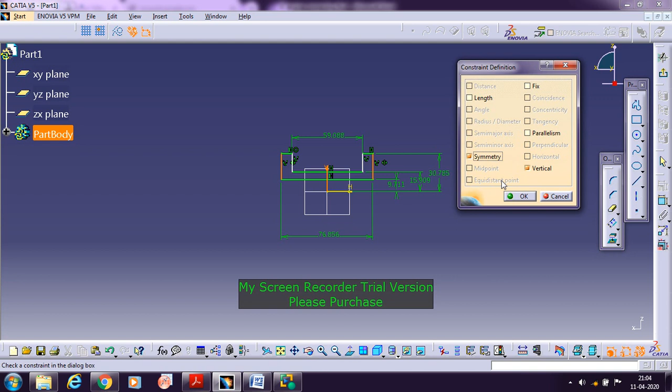Similarly, for these two lines, you need to press and hold the control button, click on the first line, click on the second line, and finally select the reference axis with respect to which you want to make it symmetric. Select the three lines, go with the constraint dialog box, symmetry, and click OK. Now you can change the dimensions.

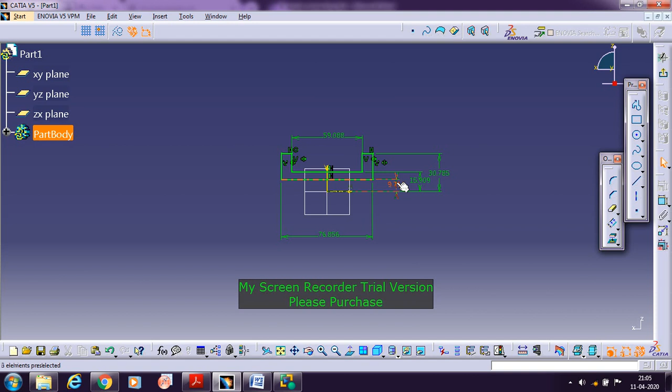To start with, if I take this minimum one, the minimum dimension is 41, but in my case when I take it, it will be more than this. So I'll come from the bigger dimension, or I can fix these two dimensions here. It will be easy. So this inner one is 33 mm, and the outer one is 39 mm.

Then, coming to the bigger dimension, I'll come from the bigger dimension here. The first one is 56 diameter. When I take the radius, it will be 28 mm. So the radius will be 28. And the second one, after 56, 48 is the next bigger dimension. When I take the radius, it will become 24.

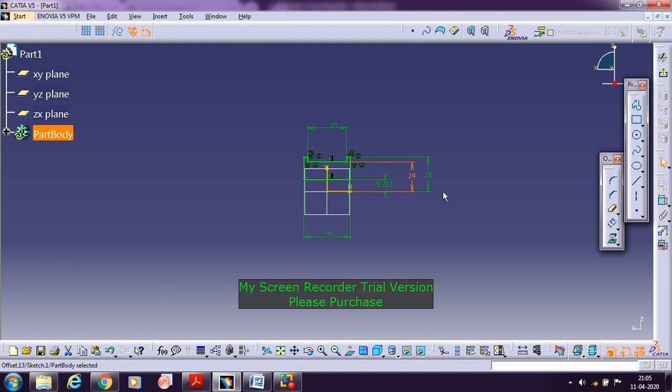And the last one is 41 mm diameter. When I take the radius, 20.5 is the radius. In this way I'll be getting the dimensions. Then it is showing the green color, so it's saying that my sketch is constrained here.

If you want to check whether it is closed or not, you can go with the sketch solving status here, click on it, go with browse, and you can see that all the lines have been iso-constrained, and then go with the geometry, it is closed here.

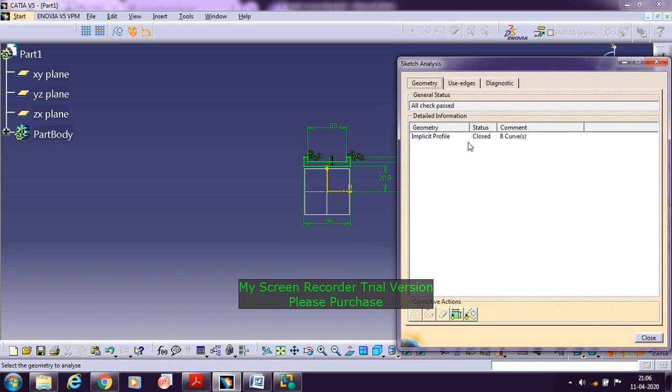The geometry is closed. Okay, so close it here. Then go with the exit workbench. Once the sketch is over, go with the exit workbench. Now, it is only 180 degrees here. This part I wanted only for 180 degrees.

You need to go with the shaft command here. It is a circular part, so for that you need to go with the shaft. Now when I go with the first angle, only 180 degrees is required. If you give 180 here and press enter, then it is asking for the axis, with respect to which you need to go.

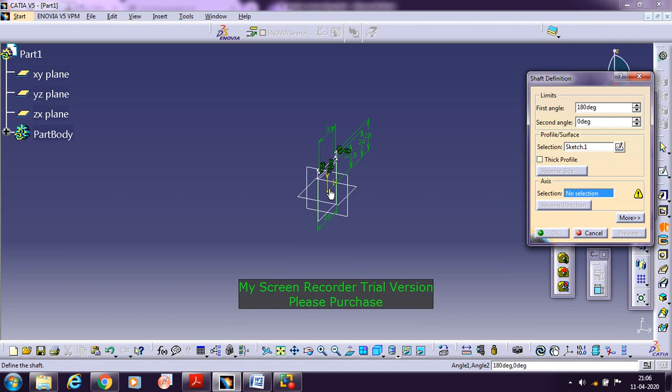So you need to select the horizontal axis, and we'll be getting it here. If you give 180 degrees as the first angle, we'll be getting it towards the right side. Similarly, if I make the first angle 0 and give the second angle as 180 degrees and then click preview, I'll be getting the part on the other side.

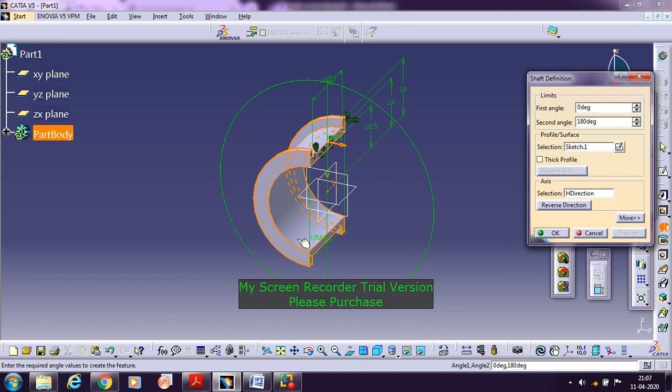This is the difference between the first angle and the second angle. You can give either the first angle or the second angle. In my case, I'll be considering the second angle as 180 degrees and then click OK. Afterwards, we have seen in the drawing that the radius will be offset from the surface at a distance of 1.5.

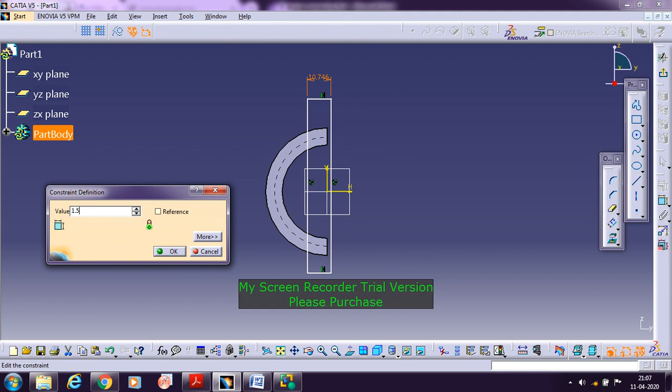Now I need to remove the extra material, the extra metal which I have created. For that you need to go with a sketch and select this plane. You need to remove this part for a width of 1.5. I'll draw the rectangle here, no need to worry about the dimensions. Now I need to fix the width; it is 1.5 mm. The width of the rectangle is 1.5.

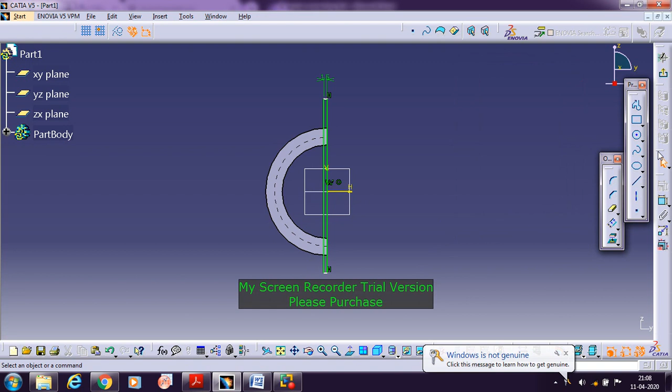Now I need to coincide this side of the rectangle with the vertical axis. Go with the constraint dialog box and click coincide, so that it will be coincided. Now this portion I need to remove. Go with exit workbench, then go with the pocket. I need to remove on both the sides, so go with the mirrored extent, click preview and click OK, so that I have removed it.

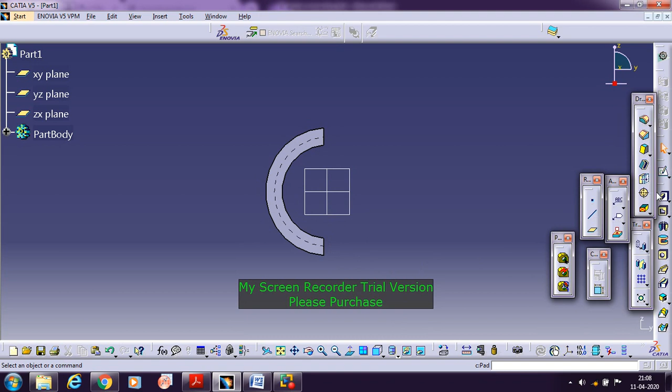Now when you go with the front view, you can check with the different views that there is an offset of 1.5 mm here. Once it is over, the next thing is we need to create the grooves on the surface. You can check there are 3 grooves which you need to form on the circular surface.

Between this groove and this groove, you need to maintain 90 degrees. With respect to the vertical axis, it is 45 degrees. There are actually 3 grooves you need to create: one at 45 degrees, one here at 90 degrees, and again at this 45 degrees one more groove.

In order to create these 3 grooves, the dimension is given here: the groove width should be 2 mm, and the depth is 0.5 mm. Now where we need to take it: when you see here, it is nowhere touching the diameter 56. The 56 is outside; it is not touching at all.

So you can see here on the 56 diameter it is not shown any profile, but it is touching this 48 dimension here. Here is the radius, so it is touching the 48 diameter here, or the radius 24. So on that we need to create it here.

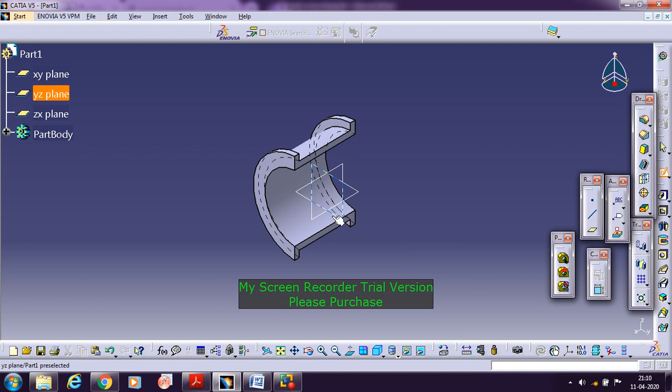So I tell you how to make it. You can select this plane. Now I need to highlight this, or I need to project it. Go with the project 3D elements and then click on this, it will be projected here. On this I need to make the groove, one here, one here and then one more here. And then I need to have the depth of 0.5 here.

For that you need to go with the offset command, click on this curve, and then make it offset by a distance of 0.5. For that you need to press the tab button so that it will come to the offset. In the offset you need to give 0.5 here. It depends on whichever direction you place the cursor.

If it is inside it will take the offset inside, if it is outside it will take the offset outside. So in my case I need to take 0.5 mm inside. If you press it, you will be getting the offset curve at a distance of 0.5 mm here.

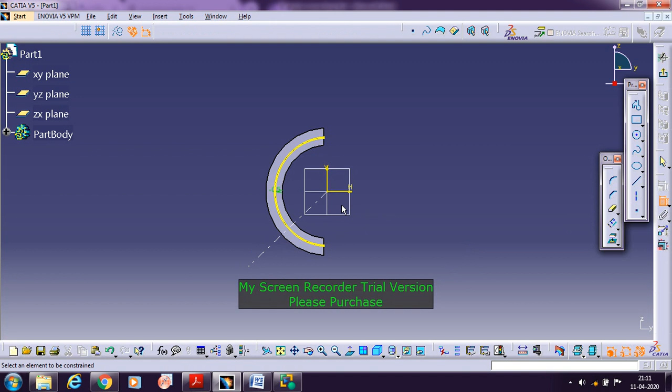Then after this you need to draw the line at an angle. Instead of taking the line, I need to delete that line. I'll be taking the axis line here. From the center, you need to draw the line and then set the angle between this line and this axis. You need to maintain an angle of 45 degrees here.

Same way you need to do it on the other side also. Set the angle to 45 degrees here. This also should be 45 degrees. Since they are perpendicular to each other, it is showing over constraint. Now we need to have one more here. You need to take the axis, on the 90-degree line we wanted here.

Now the groove width here is given as 2 mm, and the depth is 0.5. We have fixed the 0.5, and then we need to fix the width 2 mm. For that I need to offset these lines by a distance of 1 mm on both sides. Use the offset, select this line, move your cursor towards the right side, and press the tab button until the dimension comes to offset, then give 1 mm here.

So that line is offset to a distance of 1 mm. Similarly you need one more line towards this side by 1 mm. Go with offset, select the central axis line, move your cursor towards left with respect to the axis, and press the tab button to get 1 mm here. So you got this groove. We got the width as 2 mm and the depth as 0.5.

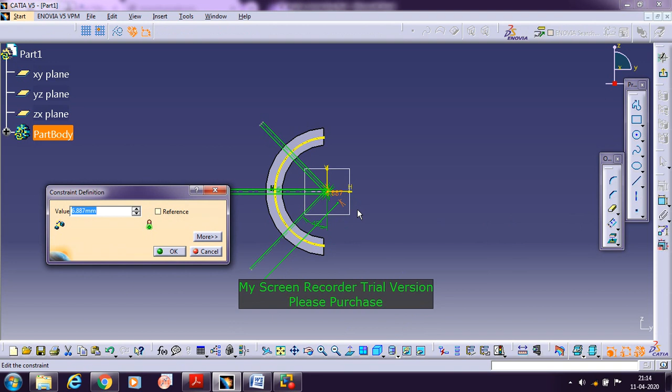So this should be 1 mm here. Okay, 1 mm. Now, when I enlarge this portion, when I zoom it out, I need to have only this portion here. The width is equal to 2 mm, and the depth is equal to 0.5. The remaining lines I need to trim off. Okay, so go with the fit.

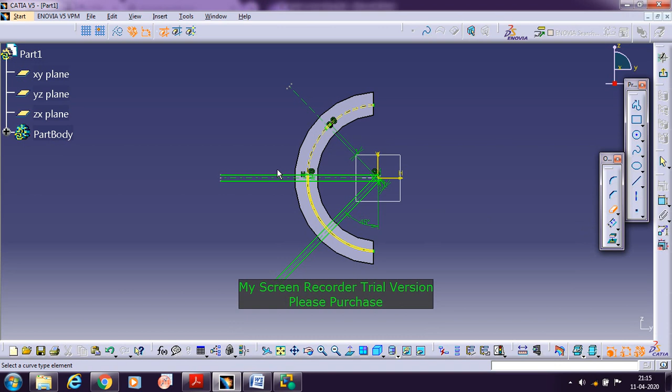Using the quick trim here, you need to remove all the other lines. So you need to remove all other lines. Here, one of the lines got deleted. So now let us redo it once again.

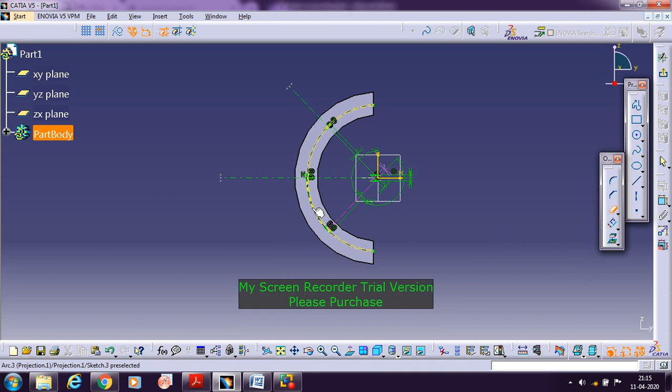For this, go with offset, select this axis line, and then go with the tab for 1 mm here. Okay, now you need to use the quick trim. So delete this line, and then delete this line, and then delete this line. And then in the center we got the lines, you need to trim them off. So select this, and you need to trim the lines which you got in the center.

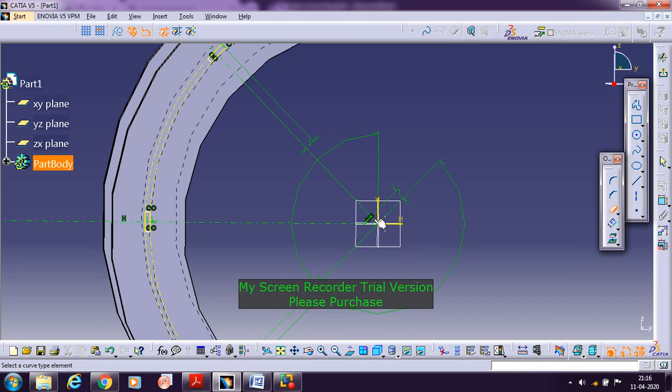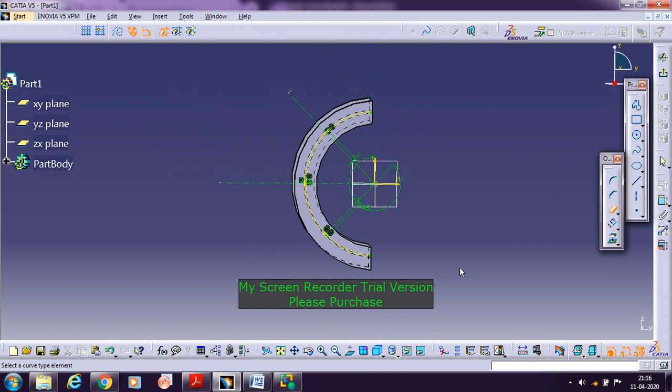I hope that we got it. Okay, so we got the 2 mm width, and 0.5 is the depth, we got it here, and here also we got it. Now in order to know it, we need to go with the sketch solving status. Let us check whether our sketch is complete or not. Go with the sketch solving status and browse it. So here, there are many points which are under constrained.

You need to go with the geometry. So here we got three closed curves. One is closed, one more is closed and one more is closed here. Only this line is left out here. This we need to delete. This is the one isolated here. So you need to press delete, so that finally we got the three closed curves.

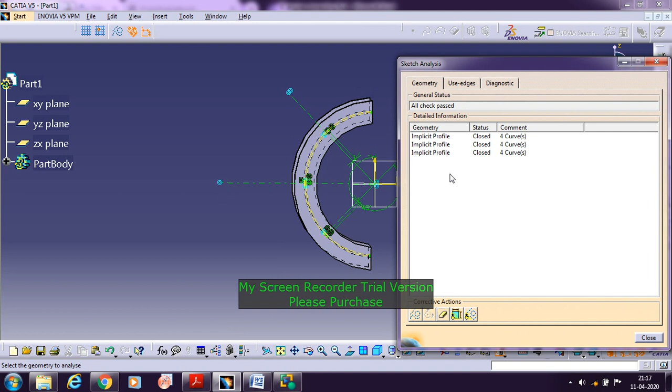And if you see here, we got the iso constraint and some under constrained points which are lying here and there. Those are points which will not affect our modeling here, so we can leave them and go with exit workbench. So we need to go with pocketing here. It is only one direction we want here, so we need to go with the pocketing.

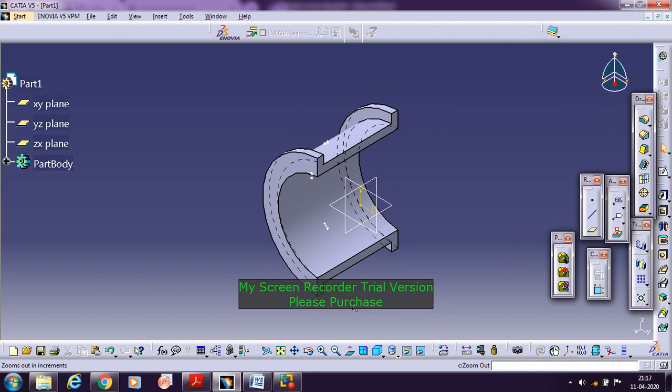When you see the sketch here, to what length do we need to remove the groove? The total length is given as 33. So leaving 0.5 on both sides, because the length is not mentioned anywhere, we can have it. Leaving 0.5 on both sides, I can go with the groove here.

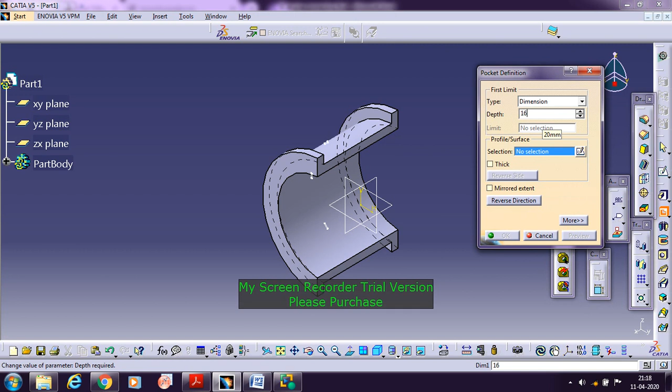So go here and you need to go with the pocket. I told 33 is given, so we need to take 32, leaving 0.5 on both sides. So we need to take 16 here and select the sketch, and we want mirrored extent on both sides. Go with the mirrored extent. Click preview and click OK, so that we got the grooves here. We got the grooves on the surface.

Okay, so here it is. When you see the sketch here, we got the three grooves. Now we need to go with one more groove which is connecting all three grooves. So let us see the dimension given for this. When you see here, it is given as oil groove: 3 mm width and 1 mm depth, for this groove which is connecting these three.

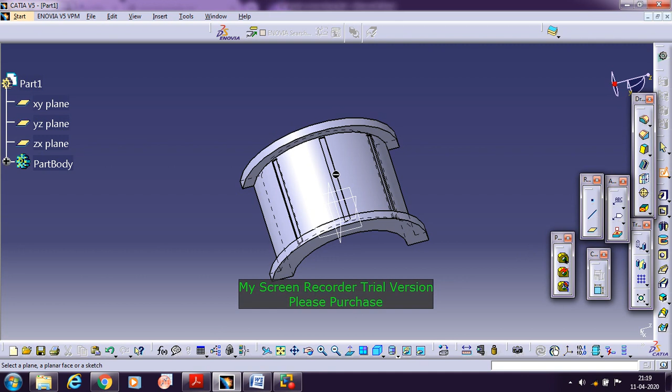So we need to go with this. Let us see how to create this. Go here and go with the sketch. You need to select the center plane here, because with respect to the central groove, selecting the center plane makes my job easier. So I'll take it here. Take the rectangle, set the dimension. So this is 3 mm and this is 1 mm. Okay, so this is 1 mm and this is 3 mm.

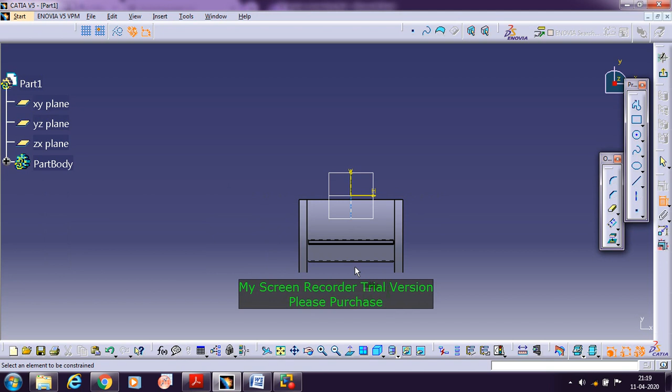Now, this should be placed centrally here with respect to this. So for that, I'll project this element here. Go with the projected elements. I need the reference, this edge, the outermost edge.

You need to select this outermost edge here. And before that, we need to have symmetric here. I need to make it symmetric, so this edge of the box, and then this edge of the box should be symmetric with respect to this axis.

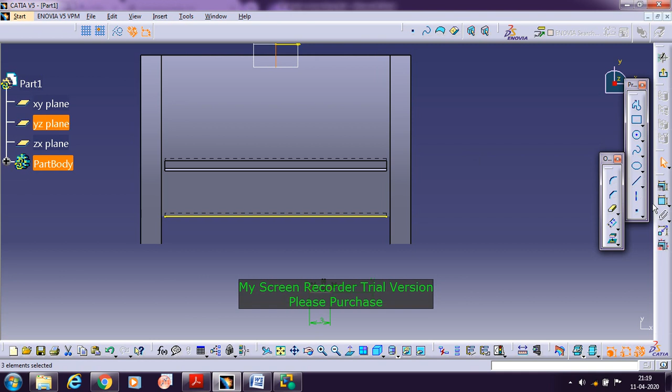Go here and then you need to make it symmetric here. You need to make it central, so that these two sides of the rectangle should be symmetric with respect to this axis. That's what I made it here.

Click OK. Now what you need to do is this edge should be coinciding with this edge here. Select this edge and then select this edge, and then give coincidence here. It is coincided here.

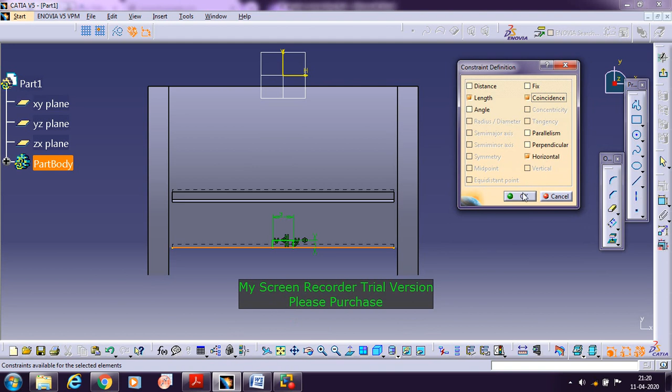Now you need to delete this line here. Now we have placed this groove in the exact location here.

Go with the exit workbench. Now we have placed the sketch here, and then I need to make the groove starting from this groove to this groove, so circumferentially I need to make the groove.

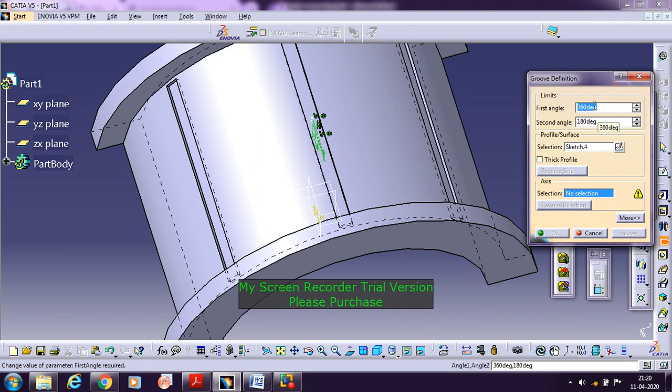So for that you need to use the groove command here. Go with the groove command. It is asking how much is the angle. In this case, I need to make use of both the angles. If I give only one side, it will take only one side, and in this case I wanted, with respect to this plane, towards right as well as towards left side also.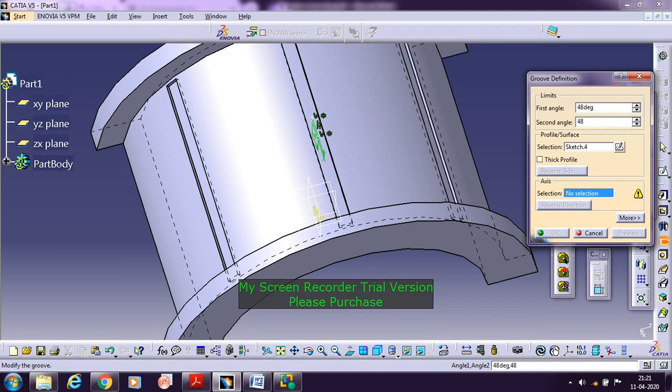So for that, when I check it here, when I give the 45 degrees, it will come to the center, but the groove has to run to the other end also. So for that you need to give the angle as 48 here. Give the angle as 48. Similarly the second angle also you need to give 48 degrees. And then it is asking for the axis.

You need to select the axis with respect to this inner surface here. Select the axis with respect to this part. So you can see here, if you give 45 degrees, with respect to 45 it will be left here. So now if I give 3 degrees extra, it will be touching the edge here.

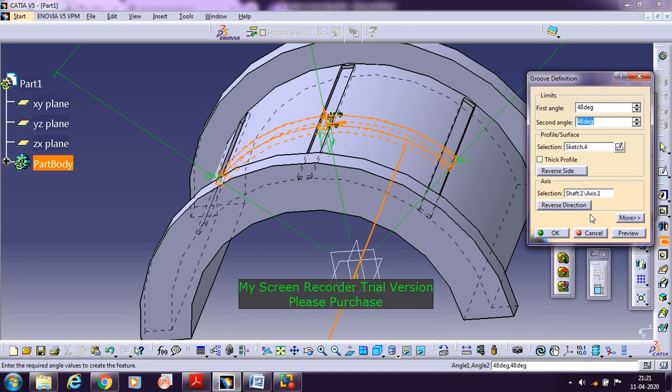So click preview and then click OK, so that we got the groove here. So we got the groove, which is connected. You can see here it is.

So you can find that there is a difference. Here it is begun with only depth 0.5, but here it is begun with a depth of 1 mm here. That you can feel it here.

Now, after making the grooves circumferentially and then axially, now you need to make the oil holes. There are 3 holes, with a diameter of 2. You need to make it here, one here, one more here, and one more. 3 oil holes you need to make, drilled on these grooves, in the center of the grooves.

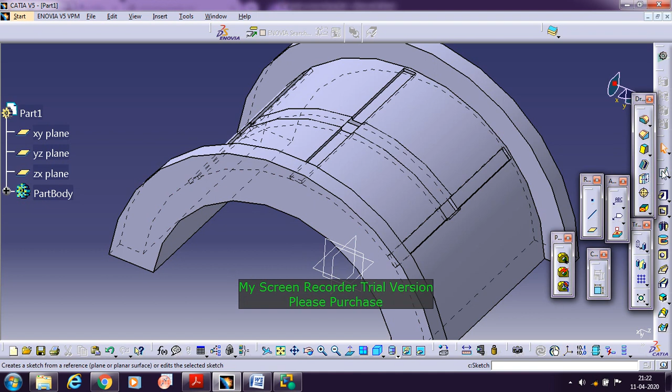So how to make it? It's very easy, you need to see here. For the first one, if I select this plane, the top view plane, if I draw it here, and go with the pocket, I can get it here. So I'll do it here. Go with the sketch, select this plane, and then draw the circle.

So taking the center point, you need to draw the circle. Take the radius. In this case, it is given the diameter as 2 mm here. Diameter is given as 2, and then go with the exit workbench.

So now you need to remove it here. Go with the pocket. You can give more than this, because until here the diameter, the radius it is 24. You can give even extra also. I'll be giving 30 mm here.

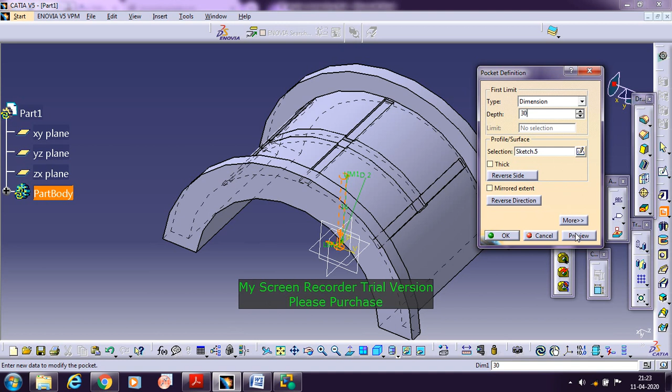I'll give 30. So click preview and then click OK, so that I got the oil hole here in the groove, centrally, in the center of the groove. Same way I need to get it here also.

I need to get it here and then here. For that you need to select the planes, so I'll tell you the procedure. Go with the sketch, and select this plane here.

From this center point, you need to draw the line, and now set the angle here with respect to this axis. Set the angle 45 degrees.

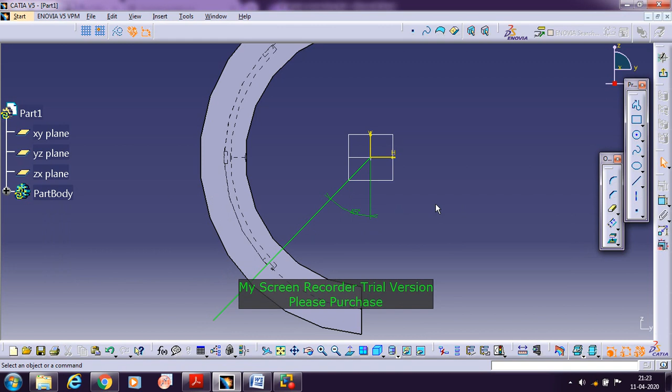Now once it is done, here it is. Go with the exit workbench. Now you need to draw, so place one plane.

The plane which is there is perpendicular to this line. For that you need to go with the plane option and create one plane perpendicular to this line. For that you select the option called normal to curve.

Select this. In this case it is asking for the sketch, so the curve is sketch number 6, and then you need to select the point where you need to make it. You can select any point here, whether it is outside the object or inside.

You can select it here, or you can select the end point of this line here. Click preview and then click OK, so that I got the plane here.

Now what I need to do is, in order to draw the circle, I'll be selecting this plane, and on this plane if I draw the circle and go with the pocket, I can get this hole here. That's all I'll be doing.

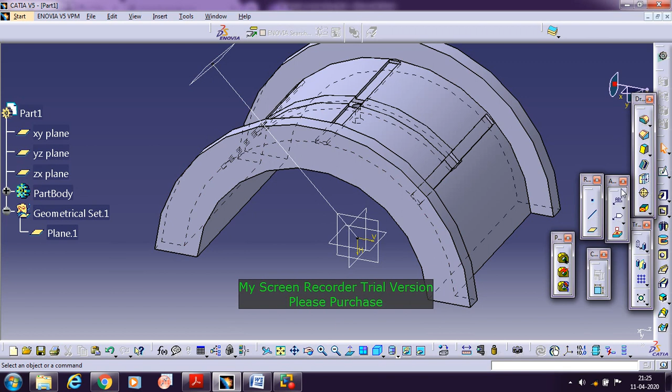Go with the sketch, select this plane. Now I got the select plane and I need to draw the circle here. Take this point and draw the circle, with diameter 2 mm. All 3 oil holes will be having the diameter 2 mm.

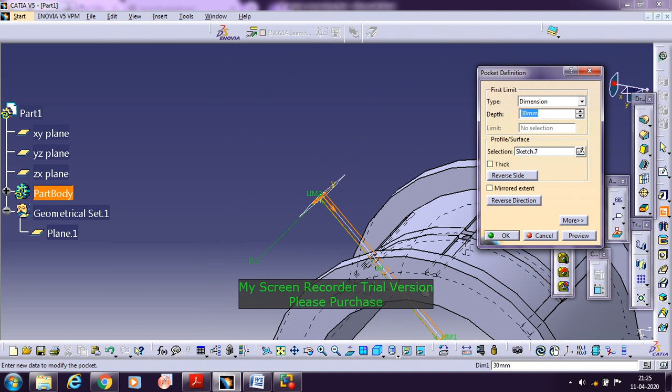Go with the exit workbench, go with the pocketing. You can give 30 mm, no problem. Click preview and then click OK, so that you got the oil hole here. So we got the 2 oil holes.

Same way you need to do it here also at an angle of 45 degrees. Take the sketch, take this plane, and draw the line from this coordinate point or center point. Set the angle between these 2 lines as 45 degrees.

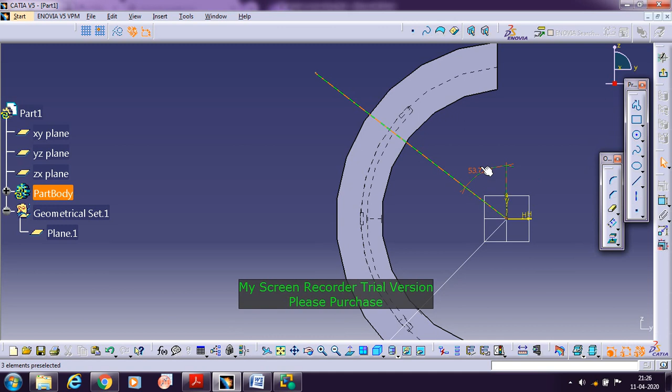Once you draw the line, go with the exit workbench. Next, I need to create the plane at this end point of this line. Take the plane, and select which kind of plane you wanted - we wanted normal to curve, that is perpendicular to this curve.

So it is asking for 3 points. No, I want normal curve to curve. So you need to select the curve here and then select the end point. Click OK here, you got it here.

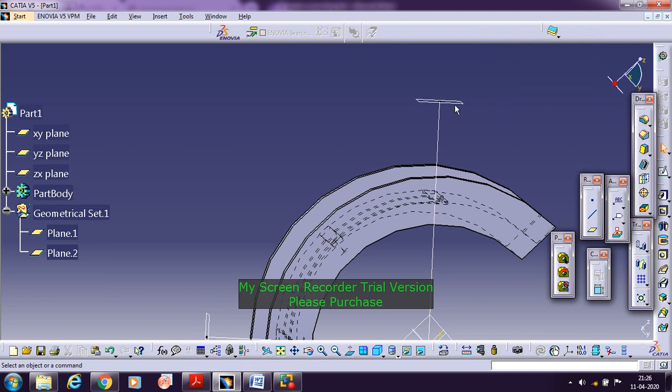Next, go with the sketch, select the plane, and draw the circle here by taking this point as center point. Now set the dimension for the circle, it is 2 mm here. Go with the exit workbench.

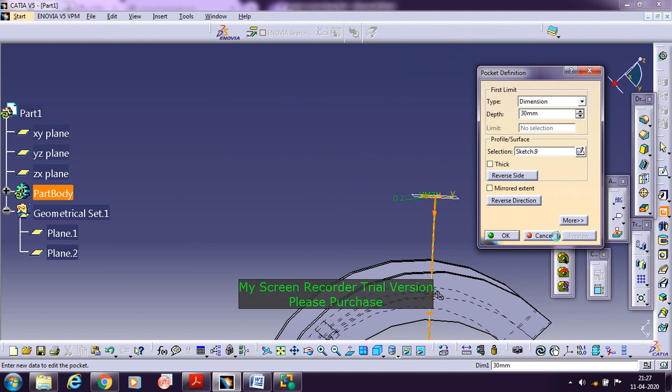Go with the pocket, you can give 30 mm itself, no problem. Click preview and then click OK, so that you got the hole here. In this way, we have drilled the 3 oil holes at the desired location.

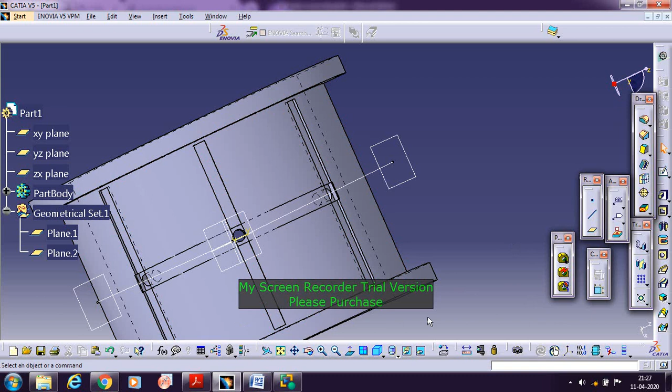Now when you see the sketch here, we have completed all the features for the part. This is about part number 5. You can see here, we have provided features only on the circumference, given radially. So we have drawn it here. Thank you.